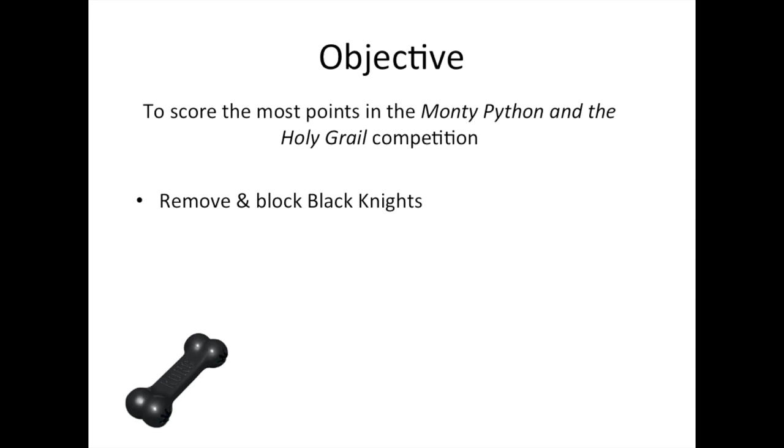The main objective is to score as many points as possible during the final competition. To do this, a variety of different challenges must be completed, including removing and blocking the Black Knight, collecting shrubbery, attacking each entrance of the Beast Lair with holy hand grenades, and capturing the Holy Grail. This table shows the distribution of points for the completion of each task.

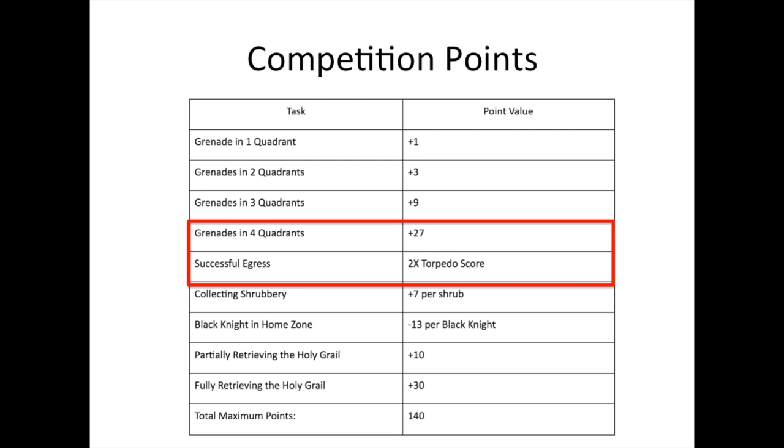It will be difficult to collect the shrubbery and the Holy Grail because 2 and 3 teams during each match respectively will be fighting to complete the same task. Due to these challenges, the machine will focus on attacking each quadrant of the Beast Lair with grenades and exiting the competition arena, since these tasks are controlled by the machine's individual ability and will limit the different variables affecting the score each round. While all the tasks will affect the potential to score the maximum of 140 points, the machine will focus on the grenade task as it is the most feasible and has 40% impact on the final score. Since attacking each quadrant of the Beast Lair and exiting the arena are deemed most important for the final competition, the 5 design concepts focused on differing designs for the attack and egress of the machine.

Assessment of the different subsystems was based on the initial prototyping of various ideas.

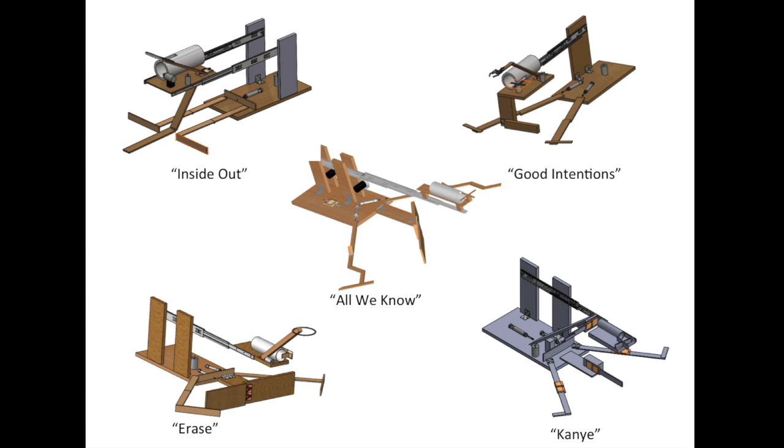The first design is Kanye. To complete the Black Knight's task, an actuator knocks an arm that uses mouse traps to hit the Black Knight into an opponent's zone. For the shrubbery task, 2 L-shaped arms fall and sweep from the lair towards the corner of the home zone. The weakness of Kanye is the need for the shrubbery task to be completed first because of the direct competition with opponents.

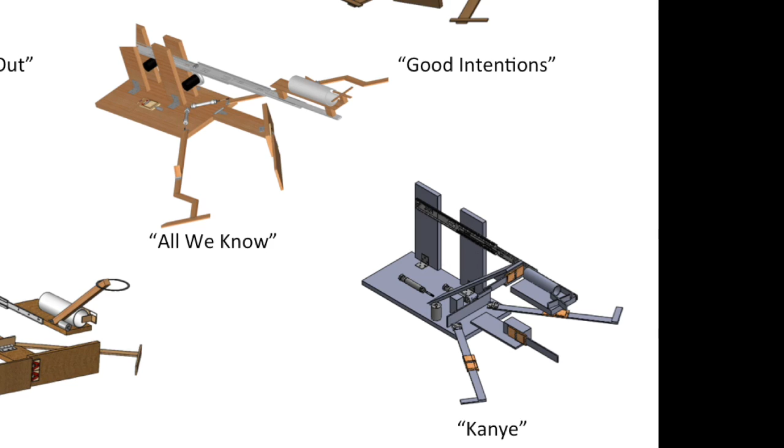To attack each Beast Lair's entrance, the grenade subsystem uses a hollow pipe and spinning wheel to deposit the grenades. Finally, the Holy Grail subsystem uses an arm with a hook at the end that flips from a platform using a mousetrap. The weaknesses of this design are that the mousetraps would fatigue and balancing the grail on the hook could possibly lead for it to fall into opponents' zones.

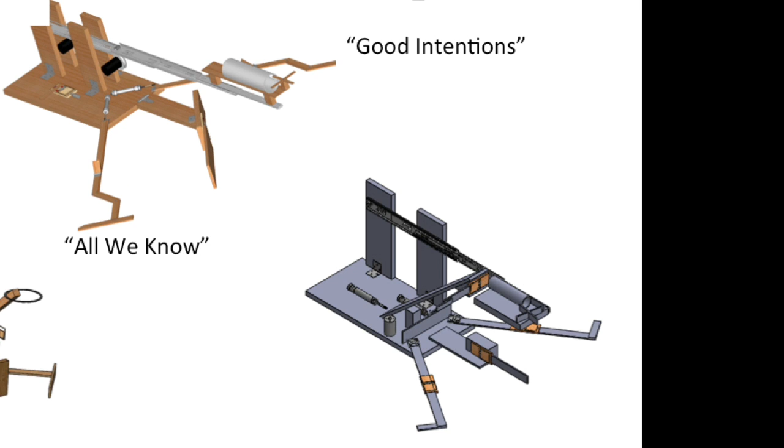The second design is Good Intentions. The Black Knight is removed from the home zone using a wooden arm on the grenade platform that hits the Black Knight from above. The extra weight added to the grenade subsystem would weigh down the platform, possibly preventing it from reaching the lair. To collect shrubbery, 2 arms flip out and fall over shrubs to rake them in using a motor and string in combination.

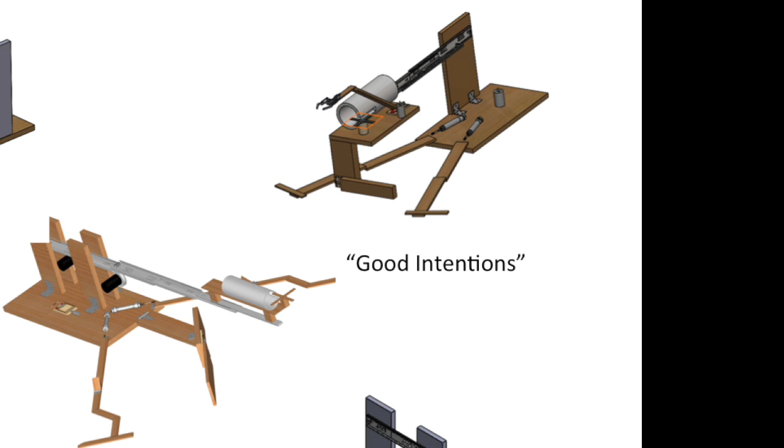To attack each Beast Lair's entrance, the grenade subsystem uses a similar design to Kanye. For the Grail task, an arm would extend with a gripper that would be activated by a solenoid. This subsystem could cause interference since it is placed on the grenade platform, defeating the purpose of focusing on the grenade task, and it could also possibly knock the Grail into opponents' zones.

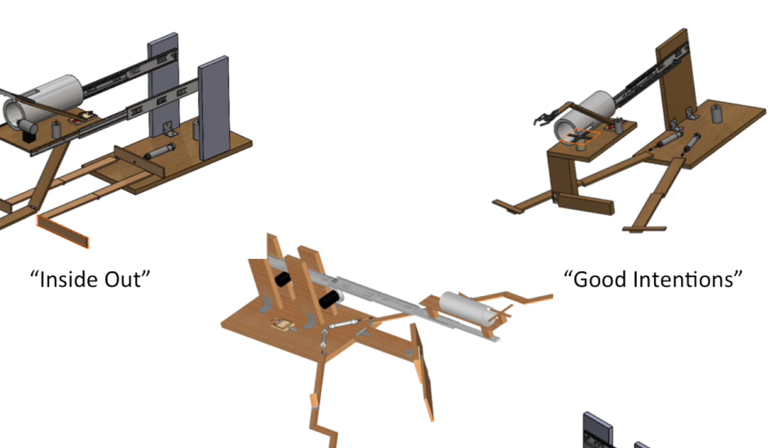The third design is Inside Out. The Black Knight task uses an arm with a scooper and an actuator to bring the object towards the machine and out of the competition arena. Because the L-shaped shrubbery arms sweep instead of raking, other teams' arms could extend over the shrubs, preventing Inside Out from collecting them. A hollow pipe on a platform releases grenades into each entrance when a solenoid is retracted.

However, a mechanical mechanism would be more reliable than depending on the myRIO to make the solenoid work properly. The Holy Grail is captured with the extension of a bug-catching net.

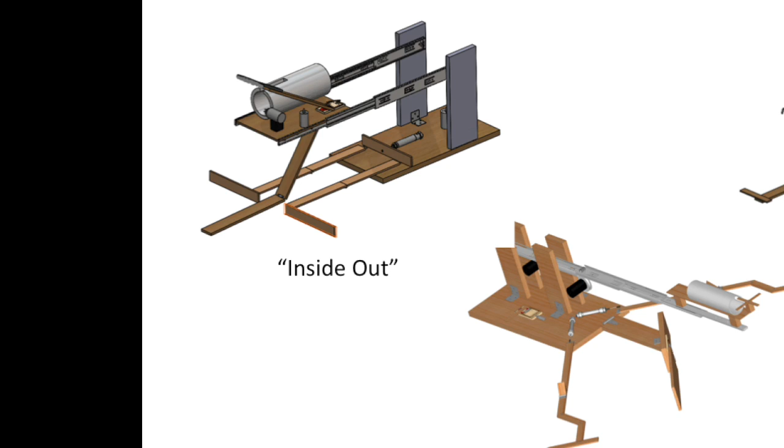The fourth design is Erase. To complete the Black Knight task, an actuator swings an arm to push the Black Knight into the other team's zone. The shrubbery task flips 2 arms towards the corner of the home zone to rake shrubs in using a combination of motor and string. Interference between these 2 subsystems is possible.

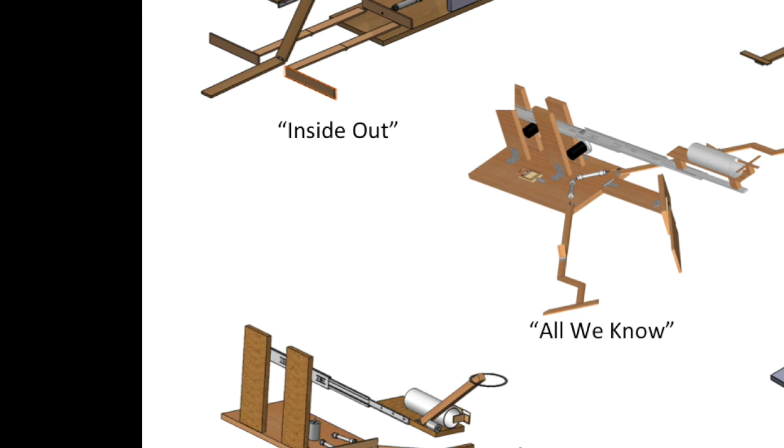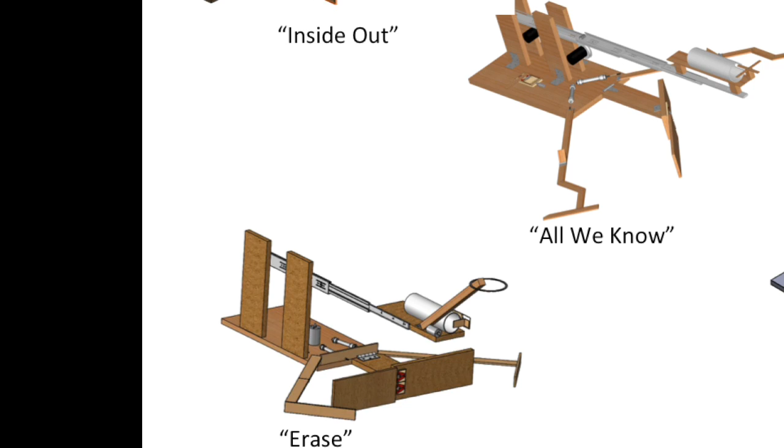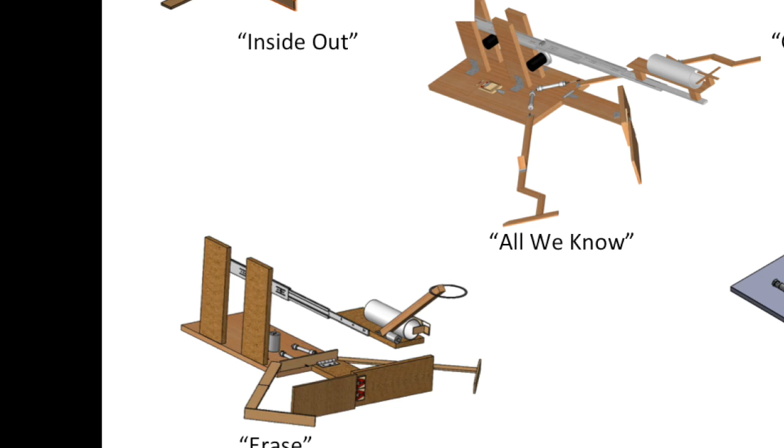The fifth design is All We Know. The Black Knight task is completed by using a wooden arm on the front of the machine that is held back by a string until a solenoid retracts and sets off a mousetrap. A clasp is released when the mousetrap is activated. While the mousetraps will fatigue and need frequent replacement, hitting the Black Knight from above allows for gravity of the falling arm to contribute to the force that removes it.

For the shrubbery task, 2 S-shaped arms are used to maximize the length while meeting the boxing requirement. They are propelled out towards the lair and over the shrubs to rake them in towards the corner of the home zone. All We Know allows for the collection of the shrubbery without interfering with the removal of the Black Knight.

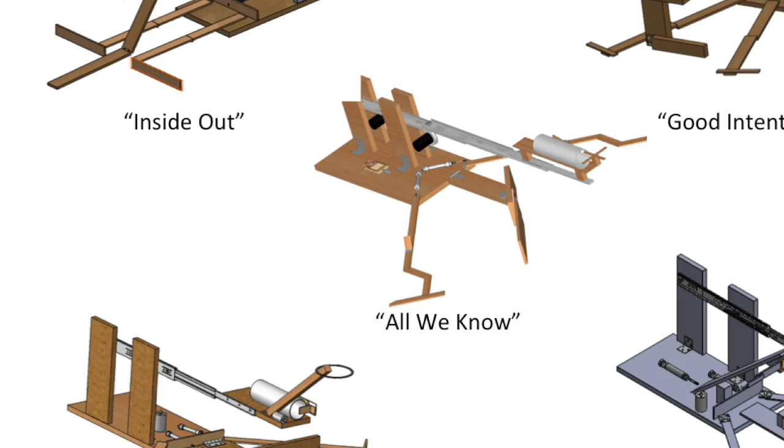Once the Black Knight subsystem has fallen and the grenade subsystem is actuated, the drawer sliders move towards the lair. The drawer slides are mounted horizontally to utilize gravity to propel the subsystem forward. A hollow pipe is mounted on the platform and deposits grenades using a wooden wheel. A Holy Grail design was not designed for this machine.

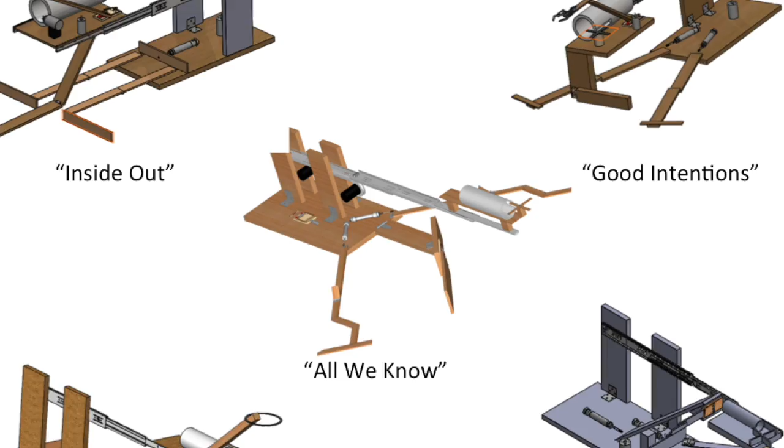Although only one design was selected, all designs were revisited to improve the final design concept. So which design was selected?

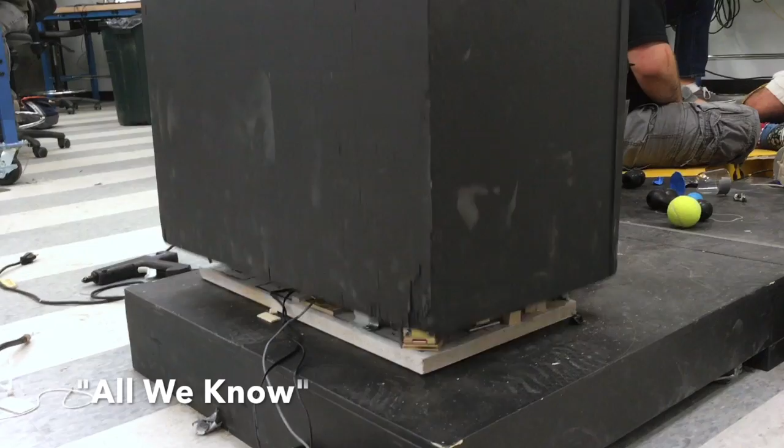Two pneumatic actuators push the shrubbery subsystem arms over the shrubbery. Wedges by the hinges maintain initial angles so the arms can flip over the machine.

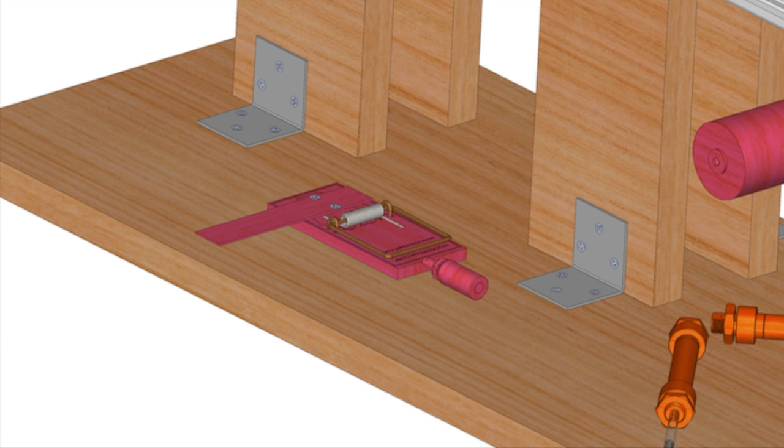A solenoid retracts and releases the tension of a string connected to a mousetrap on the machine to push the Black Knight subsystem forward. The first motor pulls in the string with the clasp to open the Black Knight subsystem, and then pulls both shrubbery arms with strings back 3 inches to ensure the shrubbery is pulled into the home zone.

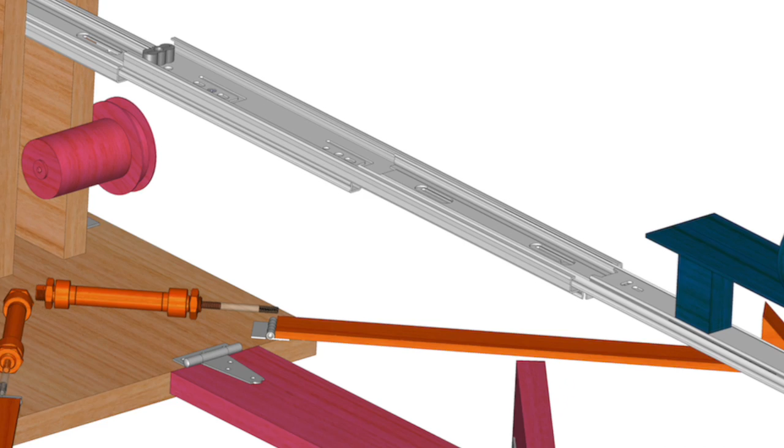Drawer sliders 1 and 2 of the grenade subsystem were mounted horizontally and propped up by the Black Knight subsystem. As the Black Knight subsystem falls, the grenade subsystem is released towards the lair in the center of the arena. A second motor is utilized to pull the subsystem back towards the home base.

The Black Knight subsystem was programmed to release after 33 seconds, as it was assumed other teams' shrubbery arms would no longer be blocking their home zone. The Black Knight was never removed from the home zone during testing before the qualifying round.

The overall designs between the qualifying and final rounds were the same, but improvements such as replacing the mousetraps more frequently, changing the direction of the removal of the Black Knight, and shortening the width of the overall subsystem were made. Testing before the competition led to the removal of the Black Knight 5 out of 20 times.

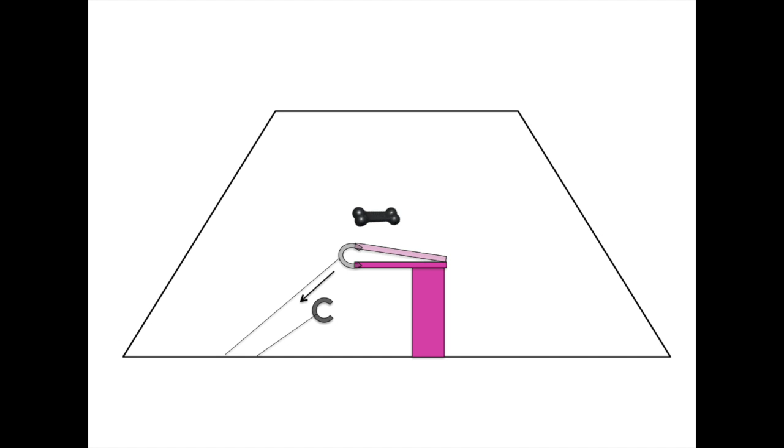Although the Black Knight only had 25% reliability, our primary incentive for removing the Black Knight into an opponent's home zone instead of bringing it into the home base was to be able to reach the marking difference of 26 points with neighboring teams instead of 13.

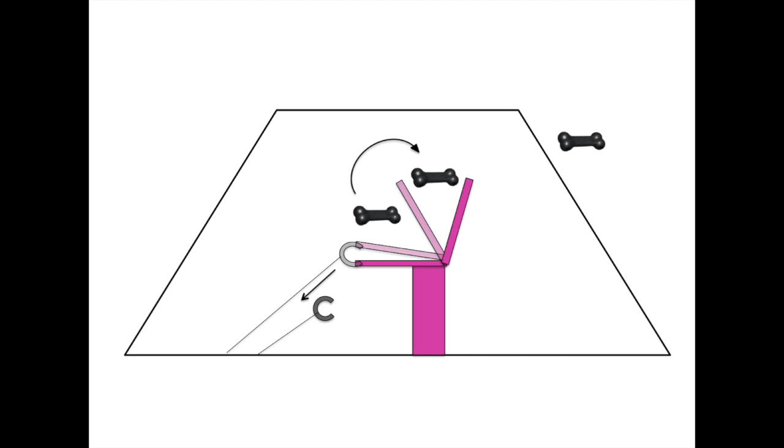Design ideas to bring it back into the home zone were not explored for the final design. All We Know allows for the collection of shrubbery without interfering with the removal of the Black Knight. It also slightly blocks other teams from moving Black Knights into the home zone.

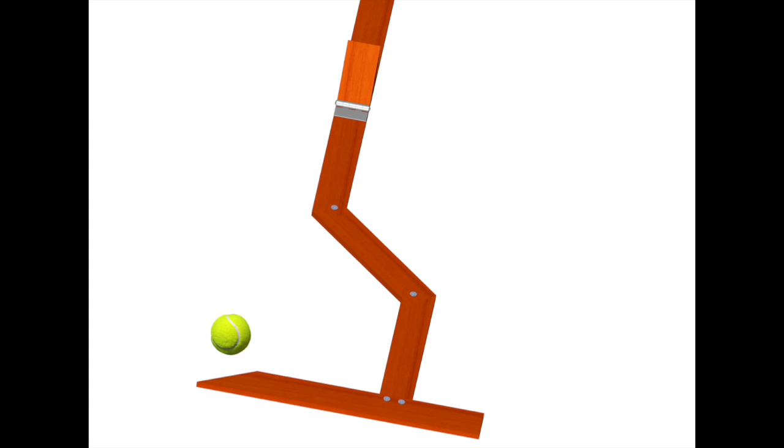The shrubbery subsystem had successful runs 6 out of the 10 times before the qualifying round, with a maximum of 14 points gained. The shrubbery subsystem changed from a sweeping to a raking motion between the qualifying and final round, so the arms would fall over the balls, increasing the likelihood of collecting them before opponents.

The S shape of the arms replaced the straight arms with the L-shaped ends to increase the amount of balls collected, since the arms were longer.

This design was reliable 12 of the 20 runs and brought in an average of 4 shrubs, with a maximum amount of shrubs collected 25% of the time. This ultimately led to this selection over sweeping arms that averaged collecting only 3 shrubs.

During testing before the qualifying round, 9 points were scored each time for the grenade subsystem. This subsystem worked properly on 4 of the 10 runs.

Most of the design ideas for the subsystem were prototyped, tested, and analyzed before the final competition. Some of the flaws that were repaired from the qualifying round machine included the change in drawer slider position from vertical to horizontal to utilize gravity, the attachment of the grenade subsystem to more centralized pillars to prevent blooming of the shrubbery arms, and a more supported grenade platform design to reduce movement of the base.

A simple revolving door design was selected for the grenade subsystem because it worked 85% of the time, with an average of 33 points collected.

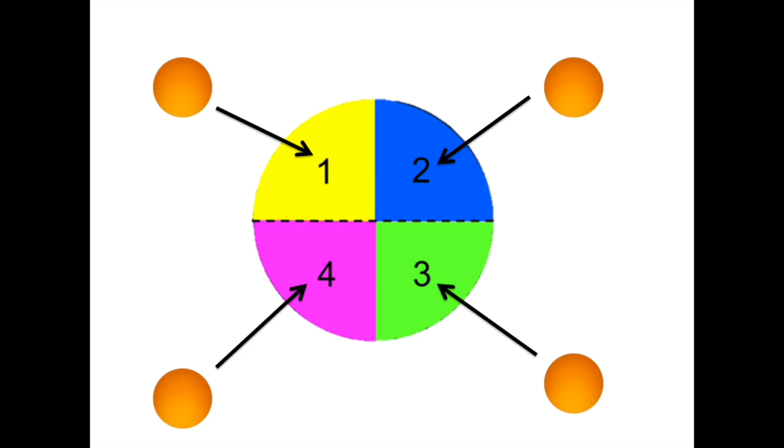Although All We Know performed well during testing, results cannot anticipate being as consistent as the initial tests, since other teams will be competing for the same objects in the final competition. So let's see how All We Know did in the final competition.

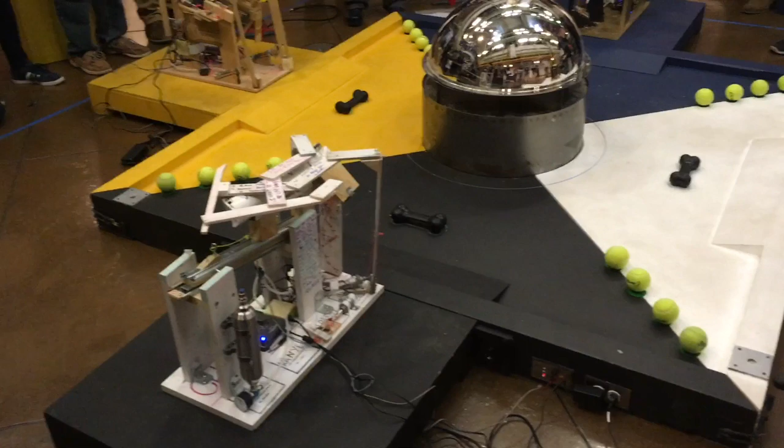During the final competition, All We Know made it past the first and second round with a placement of second and third and a score of 8 and -13 respectively.

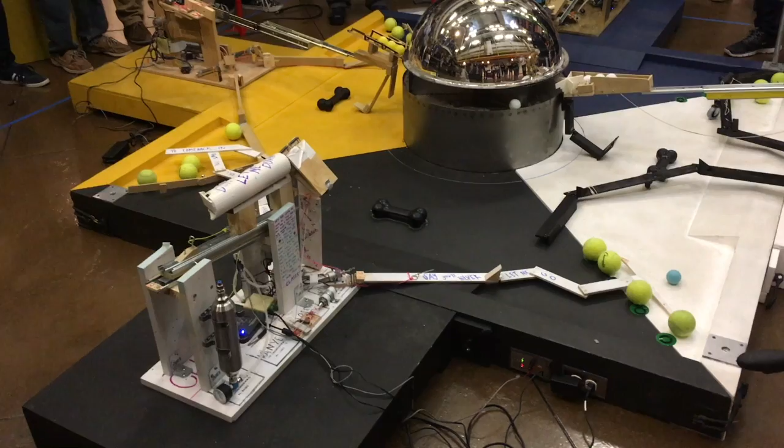All We Know was then seeded 42 for the third round. In the third round, All We Know placed third with 3 points, resulting in immediate disqualification.

Due to unknown variables in the final competition, the machine did not perform as predicted. For example, opponents retrieved shrubs first.

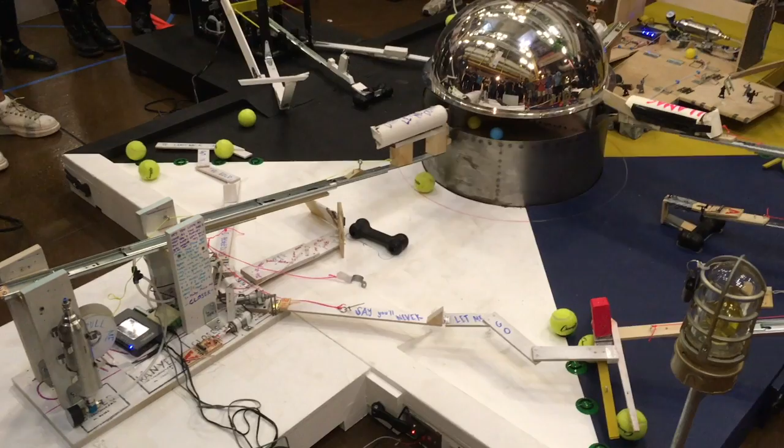Although the grenade task was the primary focus for the competition, it never reached the lair as intended during each round. Unfortunately, All We Know did not work properly because ropes tangled, inhibiting the Black Knight and grenade subsystems from actuating.

Today we covered the 5 design concepts generated and the evaluation of each of these designs. All We Know was chosen because of its ability to complete the grenade task, followed by the Black Knight task and the shrubbery task most effectively.

All We Know was tested, evaluated, and modified to maximize the points scored into the final competition. Testing proved the machine to be reliable; however, during the final competition, it did not perform as tested.

Going forward, new approaches to capturing the Holy Grail should be explored, the shrubbery arms should act faster, and motors and mousetraps should be placed better so ropes are as short as possible to avoid tangling.